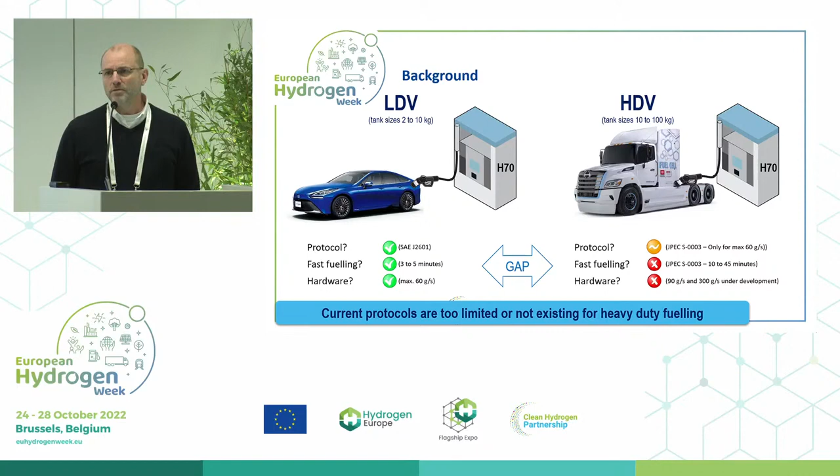There was also, within this protocol, a possibility to fuel heavy-duty vehicles, but there is quite a big gap. The SAE J2601, what we call the D tables, or the D category, was coming from the Japanese standard, but it was also using the same nozzle as for passenger cars with a maximum of 60 grams per second. So it was quite limited, and if you wanted to fuel quite big quantities, it would take really a long time. It could take 30 minutes, 45 minutes. And so there was a need for not only a new protocol, but also new hardware to fuel a bit faster in order to compete with diesel vehicles.

So I just explained the existing standard. So the new standard, we did not really develop a standard in the PRHYDE group. We developed the foundations to build a new protocol. And these foundation stones will be forwarded to the ISO working group 24, which is developing the ISO 19885-3, which will be a fueling protocol for heavy-duty vehicles. Although I must say it's not necessarily vehicles, it could be anything, boats, ships, it doesn't matter what it is, as long as it has tank sizes between 10 to 100 kilograms. So if you want to go above that, then of course another type of protocol will need to be developed.

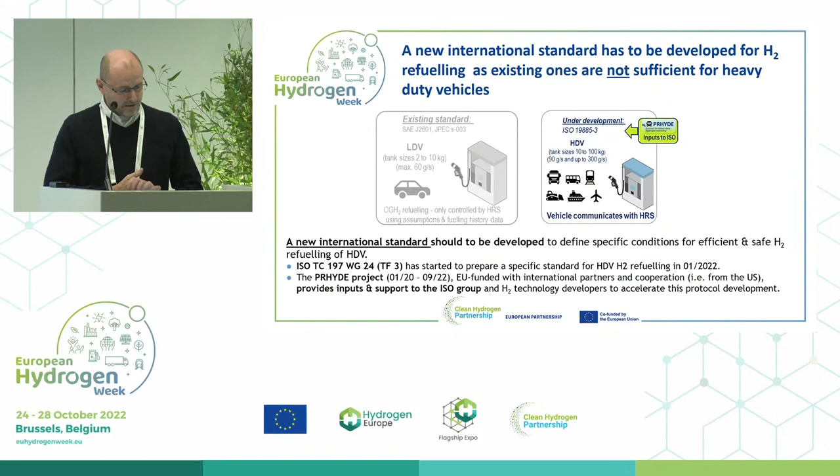It is also assumed that there is good, safe, reliable communication between the vehicle and the station. So we did not work on the communication system. This will be work for the ISO 19885-2 standard. So that's another working group. We only assumed that this was available. So all this information has already been forwarded.

To tell you also, during the development, we did not only look at the refueling time, we wanted to achieve easily 80 kilograms within 10 minutes of gaseous refueling. We also made sure that a maximum SOC could be reached properly. And also, and this is new, we also looked at the TCO, or the power requirements of the station itself to increase the efficiency, so that we do not need to fuel at extreme low temperatures, for example.

So when I talk about the PRHYDE protocol, I first need to explain to you the different types of protocols. We can divide them into three different types. Type number 3, the most advanced one, is a protocol where the station will be extremely dynamic, will dynamically make use of all the vehicle sensors. So pressure and temperature, tank temperature sensors, during the refueling itself. So it's very dynamic. There could even be possibilities that the vehicle commands the station how to refuel its own vehicle.

While type 2 protocols are protocols where first the communication will send all static data, all information about the tanks and the tank properties and so on, and then the station takes over and will do all the refueling using that data. While type 1, which is for example the SAE J2601, there is actually no communication necessary, and the station itself will take all responsibility for fueling the vehicle.

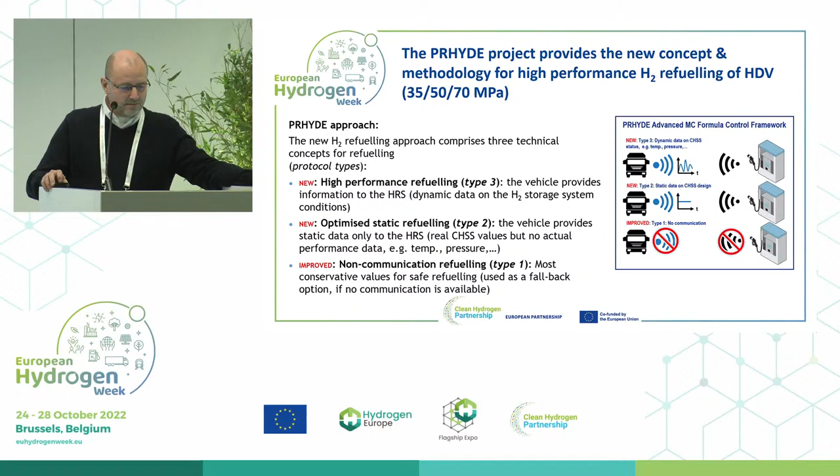So now that we know these three different types, within the PRHYDE working group, we actually developed four different protocol concepts. One is a type 2 static data protocol, and there are three different type 3 protocol concepts, which we call T-gas initial, T-gas initial plus, and T-gas throttle. I will explain that a little bit more later.

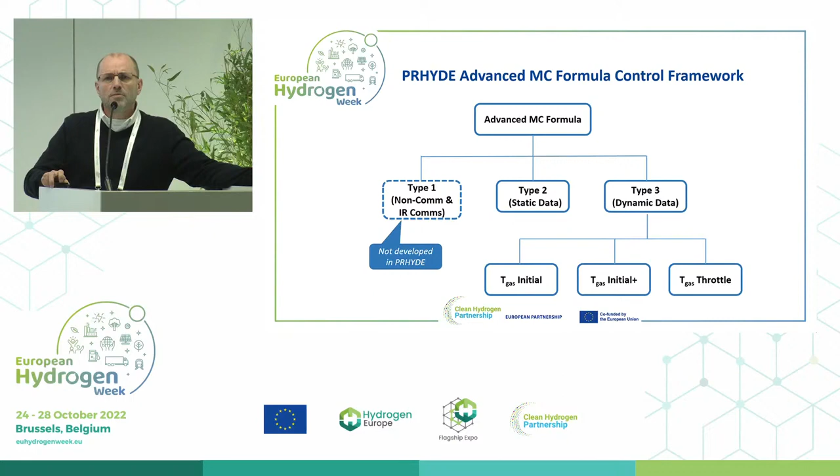So we did not work on a non-communication protocol yet. This was a decision made from the very beginning, and this will be taken over by the SAE J2601-5 standard. This working group is actually using the same principle as the PRHYDE protocol, but for a non-communication method. So before I explain the PRHYDE protocol, I first need to explain a bit the drawback of the SAE J2601 protocol.

In that case, the station had full responsibility, which means the station actually does not know anything at all of what it is fueling. So everything which you see in purple and in black on this slide, it assumed the worst case condition. So the worst type of tank thermal properties, the tank size, the number of tanks, etc., the pipes, the delta P, etc. We took the most conservative way. And that's why, using the SAE J2601 for heavy duty, the fueling would be way too slow.

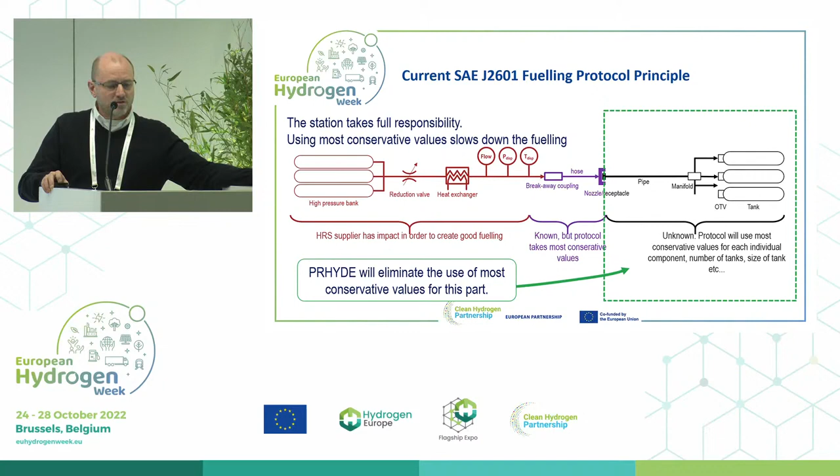So what PRHYDE is doing is eliminating the whole black part. The only part where we do make assumptions is the purple part, for the hose and the nozzle. Obviously we don't want to send all the thermophysical properties from the tanks to the station, because this is very often confidential information from the tank manufacturer. So that is not going to happen. So how did we solve this problem?

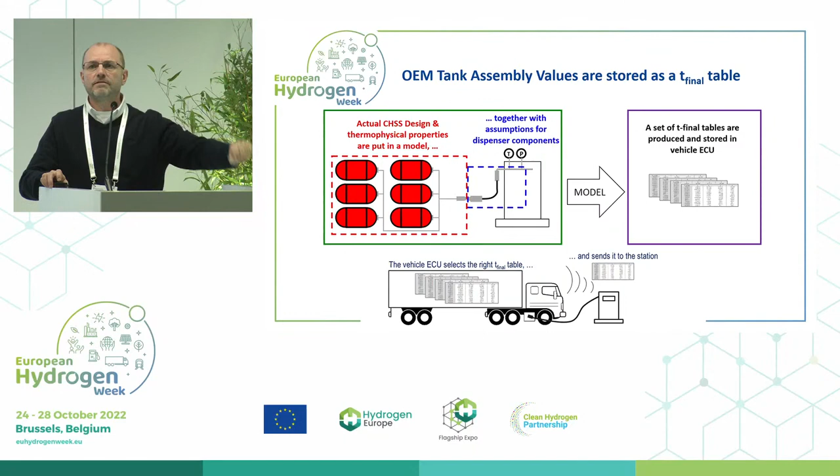Well, the OEM, or the tank integrator into a vehicle, has to put all the thermophysical properties, design, etc., into a model. It is based on H2 fills, together with some assumptions of the dispenser components, and then a T-final table will be produced, or multiple T-final tables. And the vehicle, when it arrives at the station and connects to the dispenser, will send not only what type of protocol it is using, but also the T-final table, and will tell the station, look, please use this T-final table for your fueling methodology.

With the SAE standard, you always needed a minimum of minus 17.5. This is not necessary anymore. The OEM could make tables up to ambient temperature or even higher, if he wishes so.

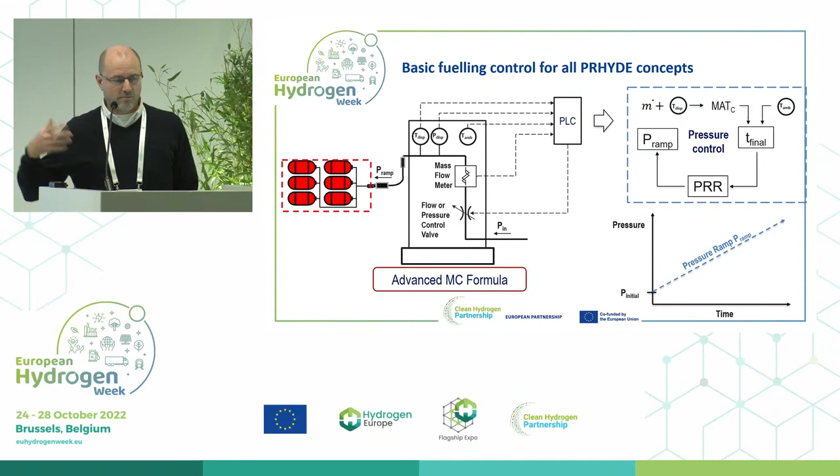So using this, on the top right, you can see that based on ambient temperature and dispenser temperature, you have a certain T-final value. And based on that T-final value, you can perfectly calculate a ramp rate, because it knows the initial pressure, it knows the end pressure, for example 87.5 megapascal, so you can easily calculate what the ramp rate is. And then if during the process the temperature varies, gets colder or warmer from the heat exchanger, the pressure ramp rate will adjust accordingly.

So this is based actually on what we call the MC formula. It's called the advanced MC formula. And the 4 types of protocols that have been developed are a type 2 static, so where we only provide the information before the fueling starts, and then there are 3 others.

The T-gas initial is actually a protocol that also takes care of the initial pressure of the tanks. If it goes to the station and the initial pressure is, for example, 20 megapascal, then you can fuel faster than if the initial pressure would be 3 megapascal, for example. So the vehicle itself will look at its own initial pressure, and then will send the table accordingly.

The third type is also a type 3, so dynamic one, which is called T-gas initial plus, and this goes a little bit further. It does not only depend on the initial pressure, but it also depends on the initial temperature, so the temperature of the tanks when the vehicle arrives at the station. Very often this could be much less than ambient temperature, depending on the driving behavior of the vehicle, and so you can fuel a bit faster. Obviously, if you have this third type of T-gas initial plus, you will have many, many more tables inside the vehicle, so it's a little bit more effort for the OEM to create all these tables.

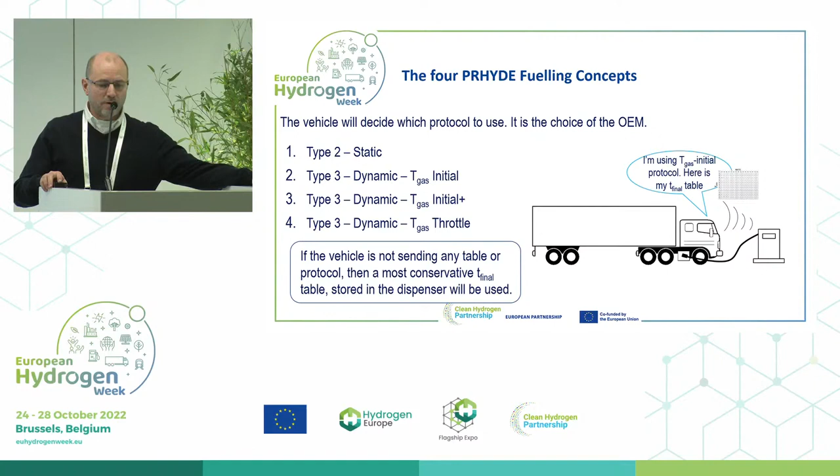So the further you go down, the more important the sensors are for the vehicle itself to have a very safe and reliable signal. While in the case of static, it's okay if there is a small tolerance. So in case it's not sending any table, then it will use probably the -5 from SAE J2601, which is a very conservative method.

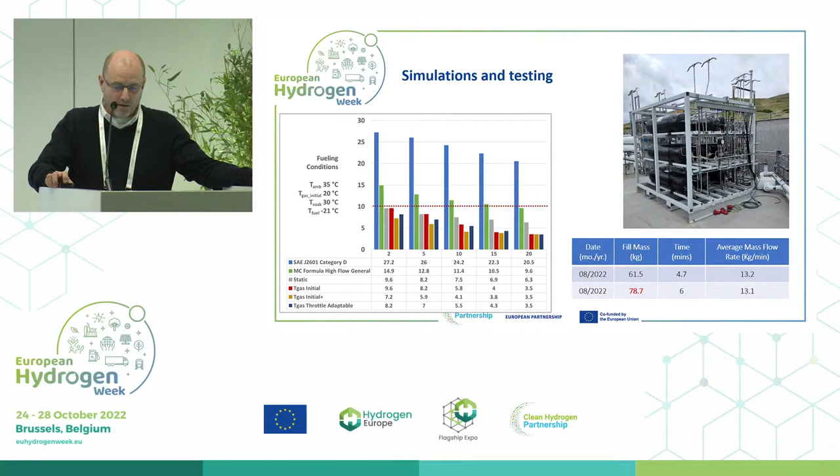So I'm sorry, I'm over my time. Thank you very much. Thank you. I apologize.

It's okay, Vincent. A very quick question from my side before you leave. I think it's very interesting that you have definitely progressed the state of the art in bringing this protocol. My question would be, what's next now? When are we going to have this protocol in place so that everyone can profit?

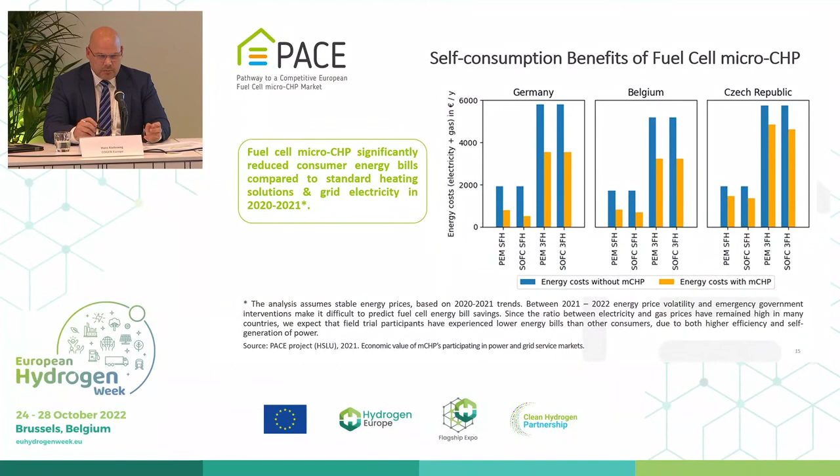Self-consumption benefits of fuel cell micro CHP. We had the Technical University of Lucerne, Switzerland, looking at the economic value of micro CHP participating in power and grid service markets. We had 3 archetypes: Germany, Belgium, and the Czech Republic. 6 research partners and 1 industrial PEM fuel cell stack manufacturer.

The HYDRAITE project was about the hydrogen quality for transportation applications. The project had 3 main issues that it wanted to tackle. First was that before the HYDRAITE project there was still a lack of representative data for the ISO 14687 standard, so the standard for hydrogen fuel quality and the impurity limits in it. HYDRAITE studied effects of contaminants originating from the hydrogen supply chain and developed methodology for determining the effect of contaminants in automotive PEM fuel cell systems.

Second thing, quite important actually, that before the HYDRAITE project there wasn't any European hydrogen quality laboratory available that could do the full analysis according to the hydrogen fuel standard ISO 14687, and of course here in Europe we are talking about its counterpart EN 17124. Within the project, 3 European laboratories were established and ready to offer their services for the fuel cell and hydrogen community.

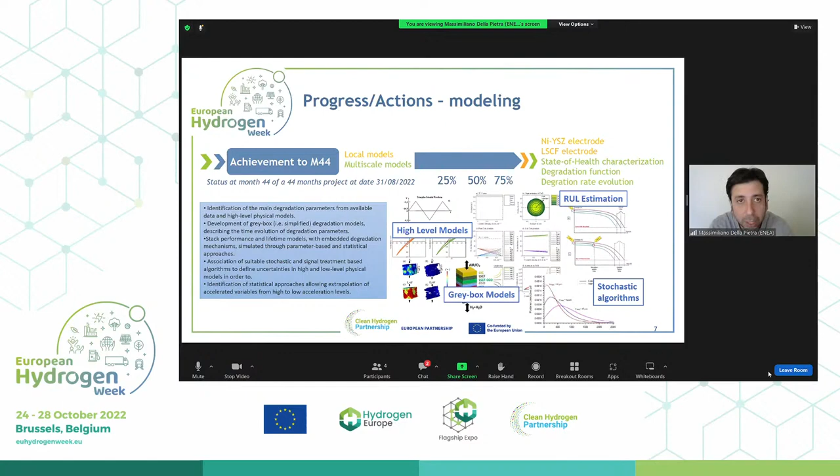Going through the exploitation of the project, as I was saying, we had the benefit of a database that was very well structured and very helpful for managing the project generally speaking, but also for the exploitation in particular, being able to transfer some of the data sets that we collected and gathered inside our database directly to open source platforms like Zenodo, for example. We were also able to publish up to 15 peer-reviewed papers in open access, gold and green. And just last summer, during the last EFCF, we held one dedicated jointly organized workshop together with the Ruby project.

Moreover, during the project, we had the benefit of an external advisory board made of 3 experts from outside the EU, already experts in the field of accelerated stress tests in the solid oxide field, from the USA, Japan, and Korea. And they were very kind and useful in the exploitation of the project, giving us advice concerning what was doable and what was not.